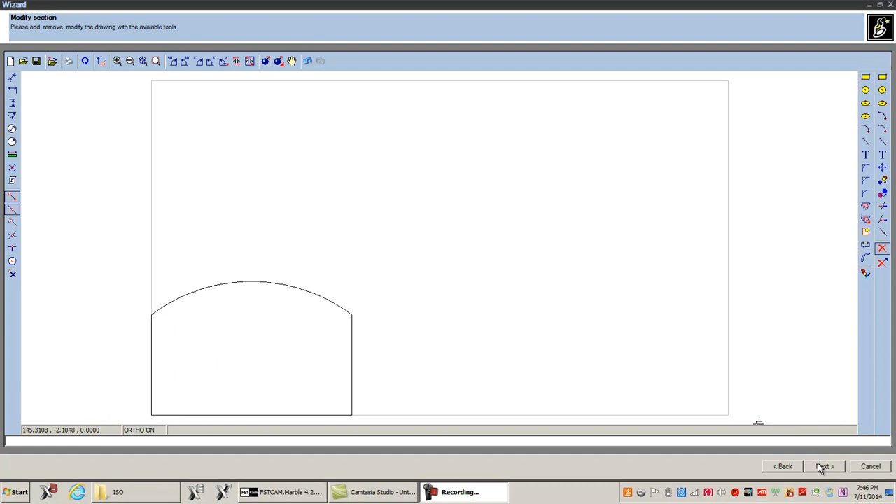Okay, I just drew this shape right here, and what I want to do is I want to saw the three sides, but using a finger bit I want to do the arc. Okay, so I drew it, and by now you know how to draw, so I'm going to hit next, and all the arrows look correct. Next again.

Okay, I'm going to split. Now I want all right. Now so far we've only basically been using a saw. Well, I'm going to leave this alone right here. I'm not going to change this to a finger bit or anything. I'm just going to leave it as disc, okay? And I'm going to hit next.

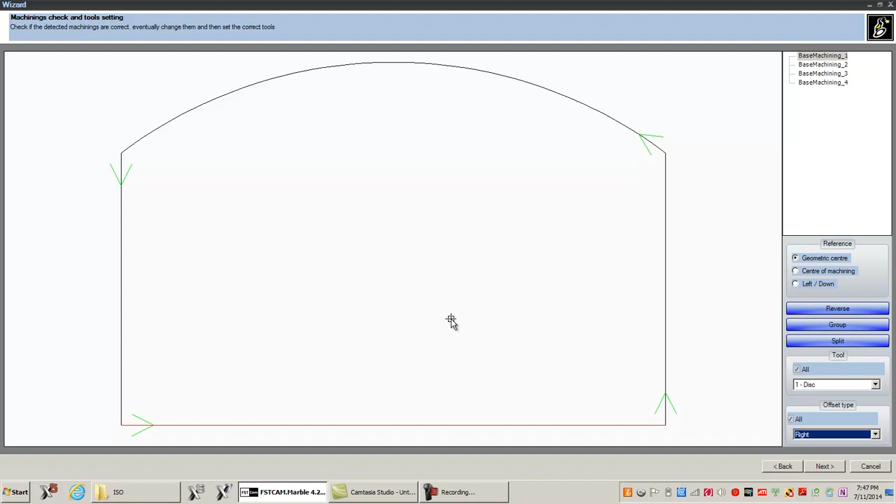By the way, let me take a second here and talk. I could make a group out of the three straight lines, and this way one operation would handle all three of those. And we'll talk about that later. Let's just go next and finish, right? Okay. So here's my part. I'm going to open this up. All right. Let's go to machining.

Edit machining. Okay. So there's a straight line. There's a straight line. There's the arc. There's the straight line. Let's take the arc. Base machining. And again, as you know, we can change this name to my arc, arc, whatever you want to call it. But I am not cutting with the disc. I'm cutting it with a mill. That's what they call a finger bit, a mill, an end mill, okay?

State, green check, I do want this. The depth, right. Now, I'm going to go to advanced data. Okay, so as we know, we can't take the 2 centimeters in one shot when we're cutting an arc. The gearbox is not meant to take that much of a cut. So we're going to subdivide this. So I'll put 5 times, so it's going to take 5 passes.

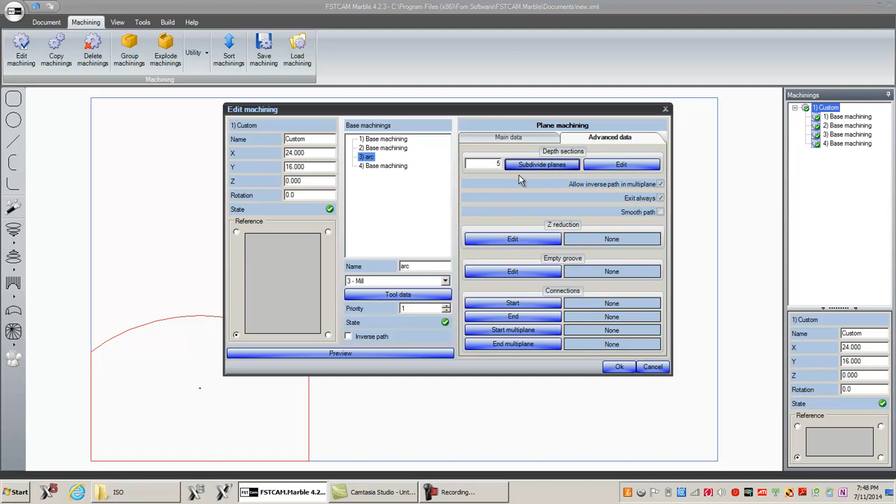Subdivide planes. So now, from the end of the part, it'll plunge down, cut, plunge down, and cut back and forth. Let's talk about the Z reduction. Okay? So first, make sure we understand. Subdivide, the Z-axis will go down, the machine cuts to the end, the Z-axis goes down, and it cuts. Okay? Z reduction, what that's going to do, I'm going to change this to an adaptive angle, factor of 0.5, and I'm going to explain that in a little bit, okay?

Basically, now what's going to happen, okay, so I got adaptive angle and subdivide only on this. So now what's going to happen, as it's machining the arc, the Z-axis will be moving down at the same time, okay? Without Z reduction, the Z-axis goes down to a depth, makes the cut, down, cut. With the Z reduction, the Z-axis will be moving as it's making the arc. And we had a factor of 0.5, so the Z-axis will move down about 1/4 of an inch.

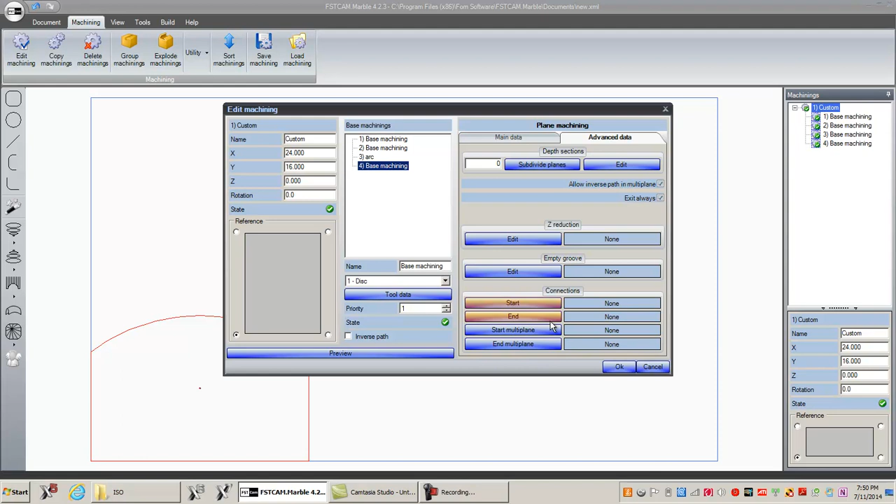Now, these three, that's being done with the disc. That's being done with the disc, and that's being done with the disc. So I'm okay there. I don't have to do anything. I'm going to hit OK. I'm going to go to Sort Machinings and set the cut directions. Okay, so I got 1, 2, 3, 4. Okay.

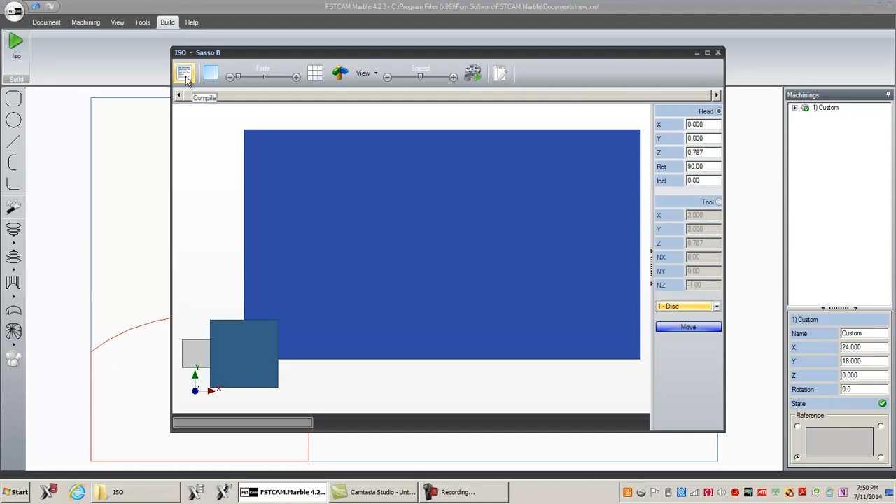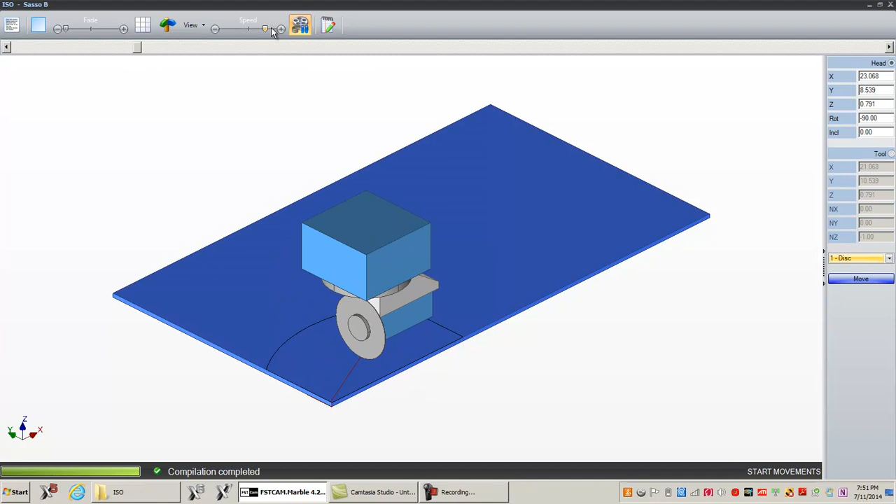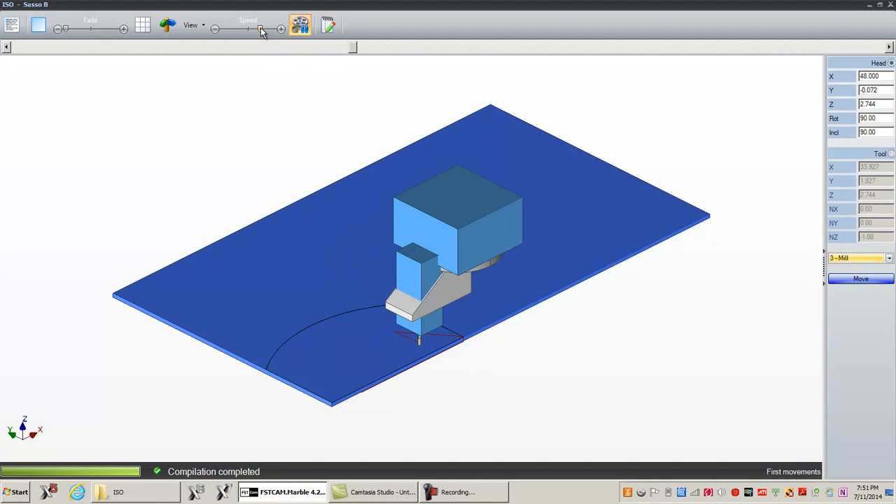Let's go to Build. ISO, compile, isometric view, and let's play this. Okay, so we're taking the 2 centimeters in one shot. One shot. Okay, so now we're using the finger bit. The Z-axis is moving down as it's cutting.

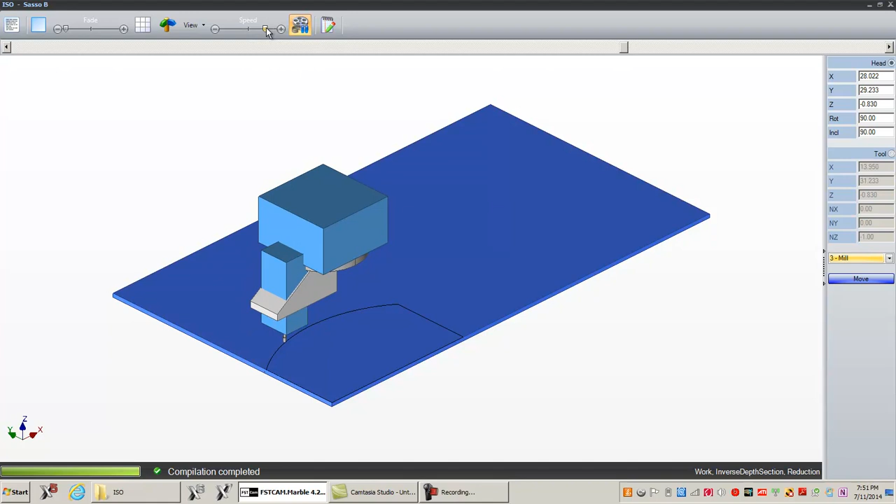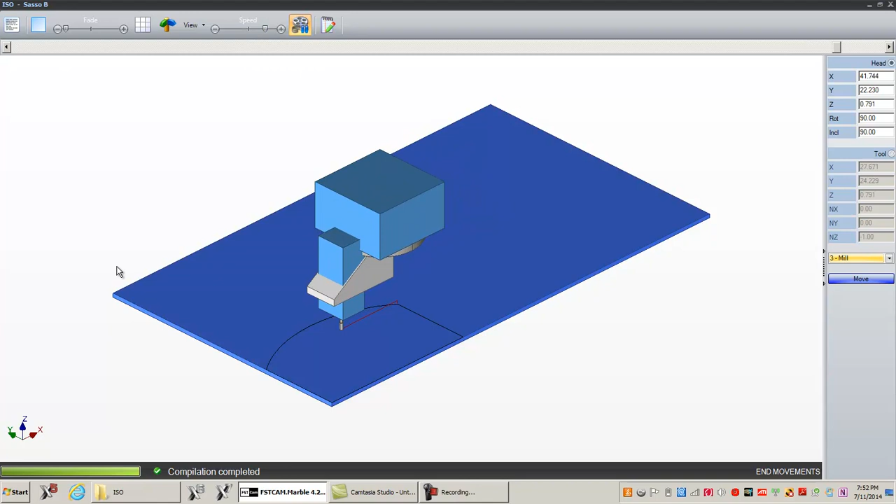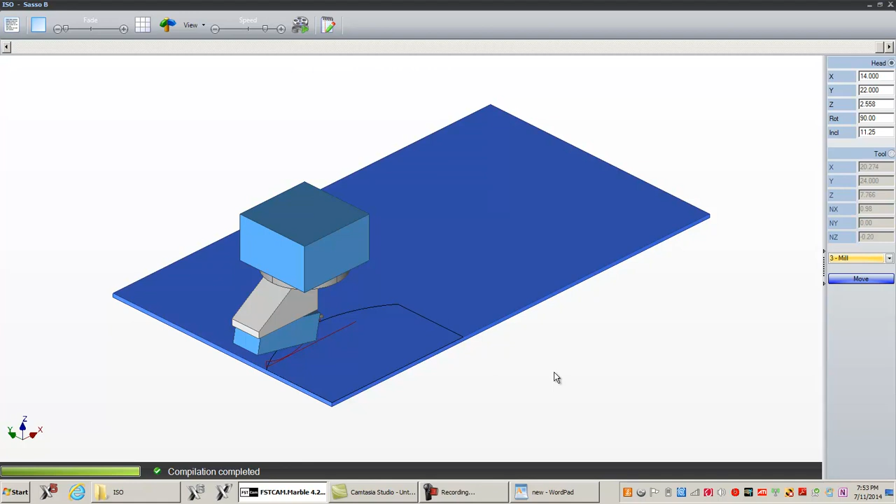See, 250, 500, 750. So what I have discovered is that that factor of 0.5 seems to equal a quarter-inch depth on the helical move. And I hope that answers some questions. Again, what we should have done probably is just made a group. I'll do something like that in a little bit here.